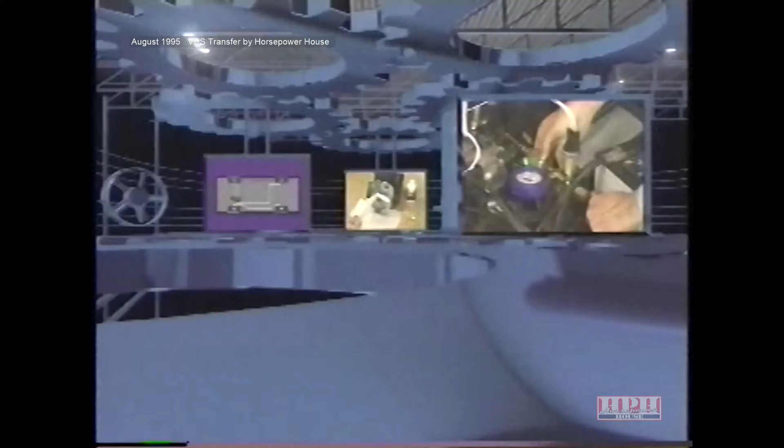In recent years, anti-lock brakes have become a common feature on new vehicles. Many different kinds of ABS systems, produced by a variety of manufacturers, are found on Chrysler Corporation vehicles. Keeping track of these systems can sometimes be quite a challenge.

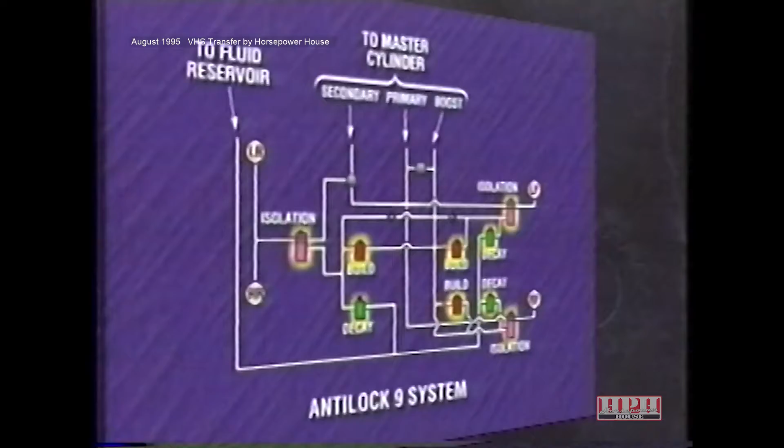Anti-lock 9 includes 3 isolation valves, 3 build valves, and 3 decay valves, for a total of 9 solenoid valves, hence the name Anti-lock 9. Anti-lock 10 uses an additional isolation valve, so there is one in each of the rear wheel circuits. There are other important differences between these systems as well, including diagnostics and vehicle application.

The Bendix Antilock 9 system is found on 1989 to 1991 Jeep Cherokees. You'll find the Antilock 10 system on a few more models: 1990 to 1993 Dynasty, New Yorker Salon, Imperial, and New Yorker Fifth Avenue; 1991 to 93 Caravan, Voyager, and Town & Country; and 1991 to 1992 Premier and Monaco, all optionally equipped with Bendix 10 systems.

Earlier this year, Chrysler Corporation published a manual specifically covering these two systems, the Bendix Antilock 9 and 10 Service and Diagnostic Procedures Manual. All service and diagnostic information for vehicles equipped with the Antilock 9 and 10 systems, except for Premier and Monaco, can be found in this manual. It supersedes all other service and diagnostic manual information and training materials previously published on these ABS systems.

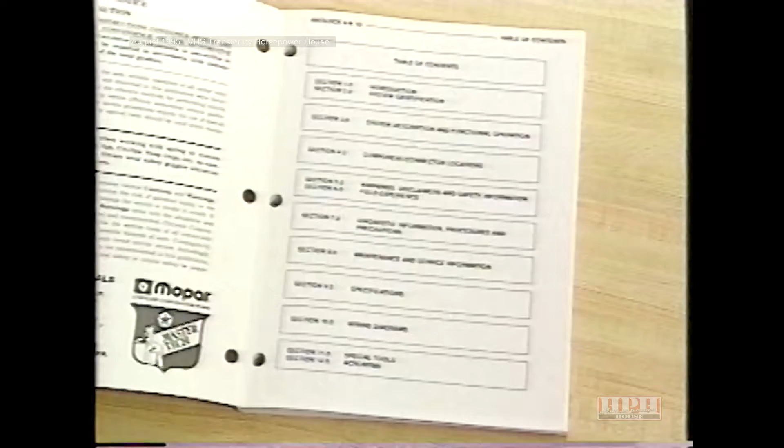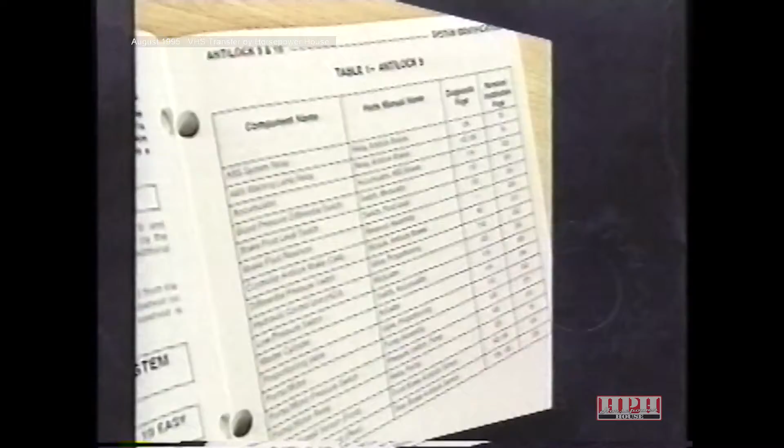Since this manual is set up a little differently than both the service manual sections and diagnostic procedures manuals you're used to, let's take a few minutes to familiarize you with the format. This manual is divided into 12 sections. The first 2 sections contain introductory material, including component charts listing the locations of both diagnostic and service information for various components, and ABS applications charts.

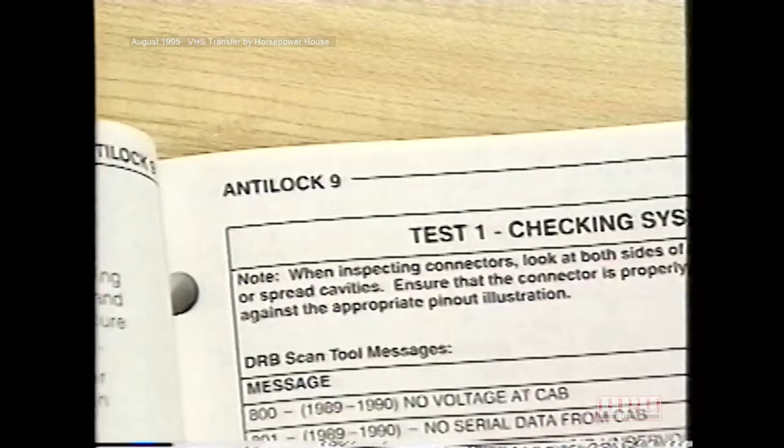Next, you'll find description and operation information for each of the systems, followed by connector pinouts and component locations. By the way, each section in the manual contains its own table of contents to help you find information within that section. The next major section contains diagnostic procedures. The first part of the section contains Antilock 9 procedures, and the latter part is for Antilock 10. Always be sure you're in the correct section before beginning any diagnostic steps.

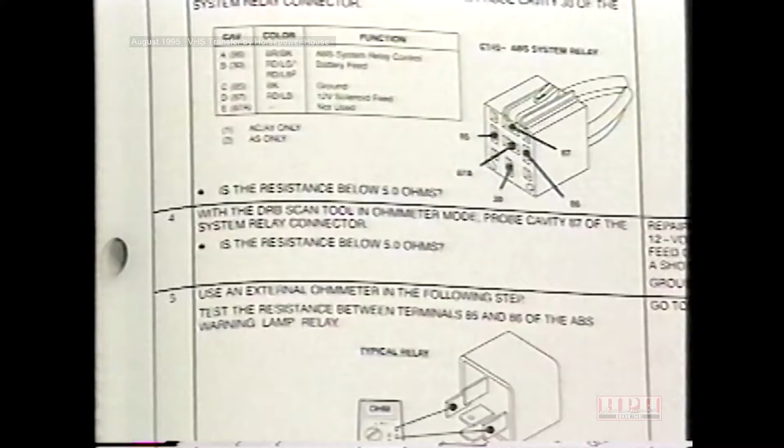As you'll notice when you look at the diagnostic procedures, this section does not use the flowchart diagrams you're familiar with. Rather, it uses diagnostic charts, but these are just as easy to use. Just perform the action described in the action box and answer the corresponding question either yes or no. Your next step, or a repair, will be indicated in the appropriate box.

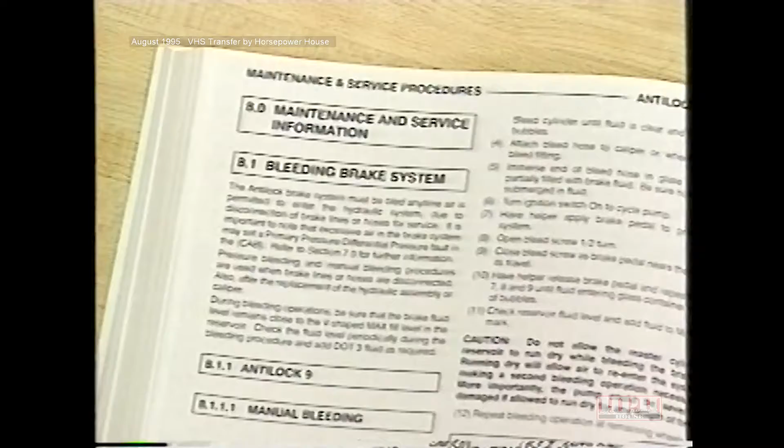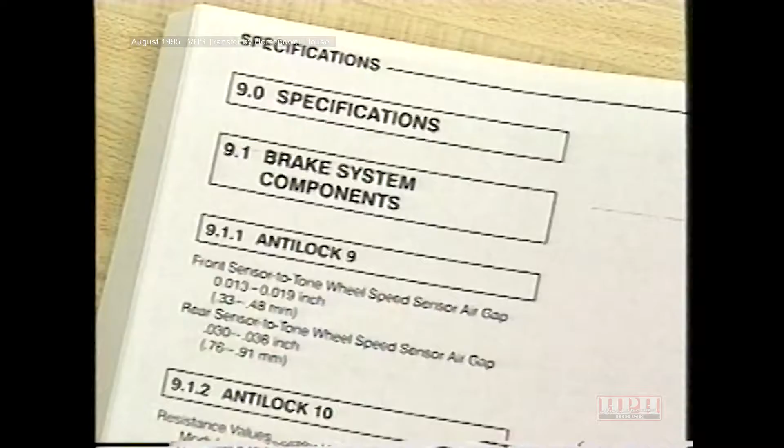After diagnostic procedures, you'll find the maintenance and service procedures. Again, the procedures for Antilock 9 and Antilock 10 are separated, so be sure to look under the appropriate system. Section 9 is the specification section, where you'll find such things as wheel speed sensor to tone wheel gaps, service part numbers, and tightening references.

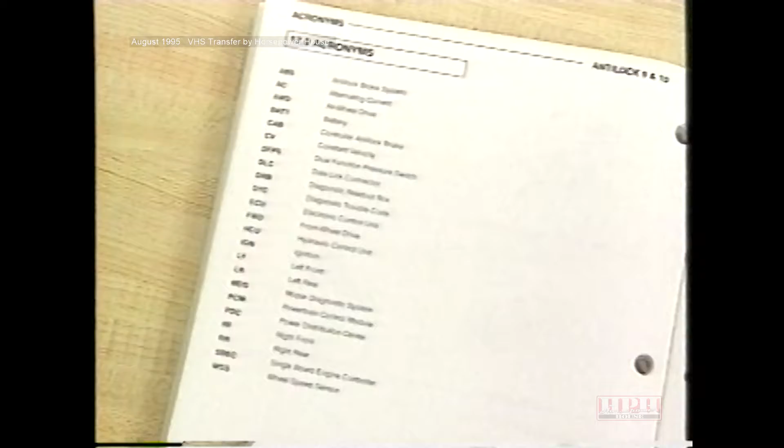If you need to reference wiring diagrams while performing service or diagnostic procedures, these are also available in the manual. You'll find wiring diagrams separated by body style in Section 10. And finally, a special tools section and acronyms can be found at the end of the manual.

In the next section, we're going to take a look at a diagnostic procedure on the Antilock 10 system. But first, let's take a minute to answer this review question.

True or false? The Bendix Antilock 9 and 10 Service and Diagnostic Procedures Manual should take precedence over the 1991 Bendix ABS and AW4 Transmission Systems Diagnostic Procedures Manual for Jeep. The answer is true. The Bendix Antilock 9 and 10 Service and Diagnostic Procedures Manual should supersede the ABS information in all old service, diagnostic, or training manuals.

One condition you may encounter on the Bendix Antilock 10 system is a master cylinder seal leak. With this condition, the yellow ABS warning lamp and the red brake warning lamp will be illuminated.

In addition, the pump motor will run continuously, or in a few cases, will cycle on and off frequently. A low accumulator fault will also be set.

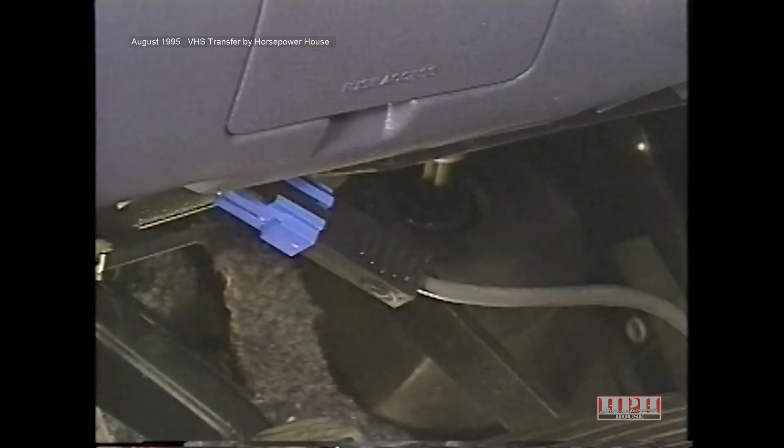So, after a visual inspection, diagnosis of the problem should begin by using the DRB3 to check the system for faults. You'll need to use SuperCard CH8000 with the DRB3 for any of the vehicles equipped with Antilock 10.

Checking for DTCs, we do in fact get a low accumulator fault. So, following the chart in the Antilock 10 Diagnostics section, we proceed to test 7.

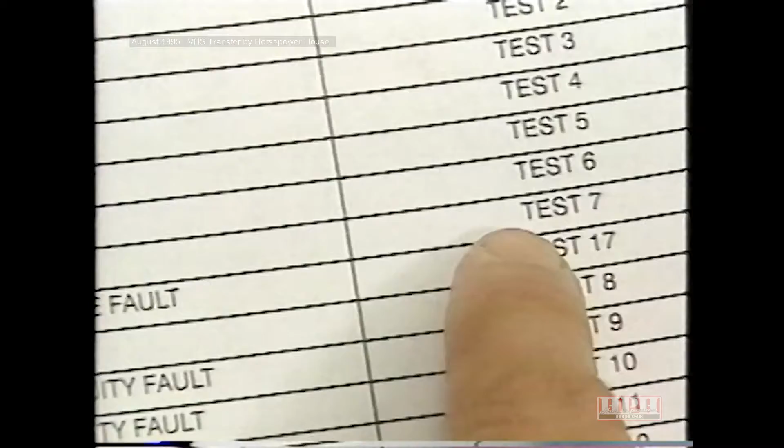Remember, if any other faults are present at this point, be sure to make a note of them. Diagnosis and repair will need to be performed for each fault you encounter, and should be performed in the order in which they appear here.

Test 7 is the low accumulator fault test. On the page preceding the diagnostic steps, we can find background information about the fault, including a brief description, symptoms, and possible causes.

Looking at the actual diagnostic procedure, Step 1 asks if Test 1 has been performed.

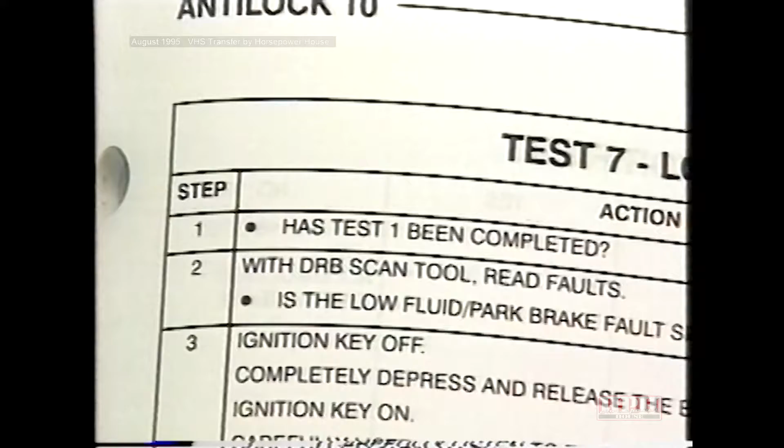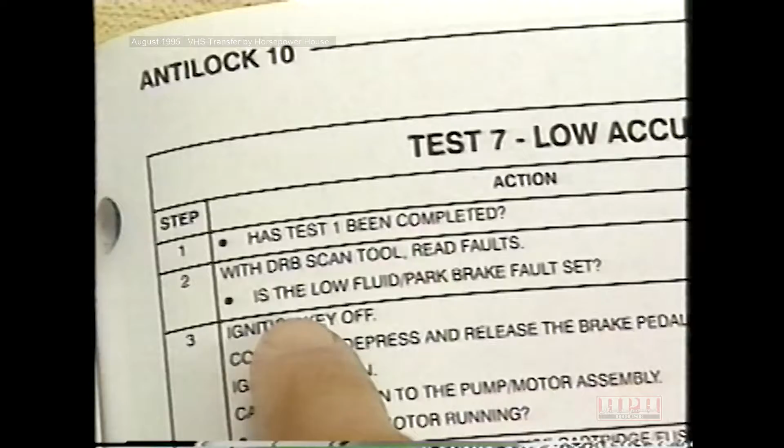Remember, Test 1 was to read DTCs, so yes, we have finished this step. In Step 2, we are asked if the low fluid park brake fault was set. In this case, no other faults were set, so we answer no and move on.

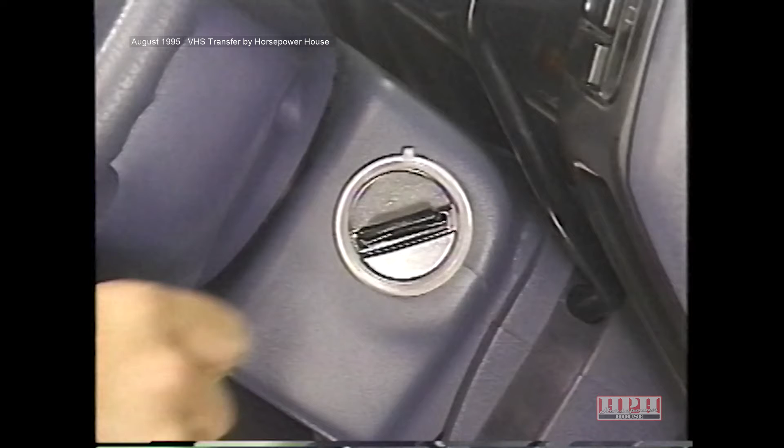Following the procedure, we now press and release the brake pedal 40 times to depressurize the accumulator. The ignition should be off for this part. Once we get to 40, we turn the ignition on to find out if the pump motor is running, and we can hear that it is.

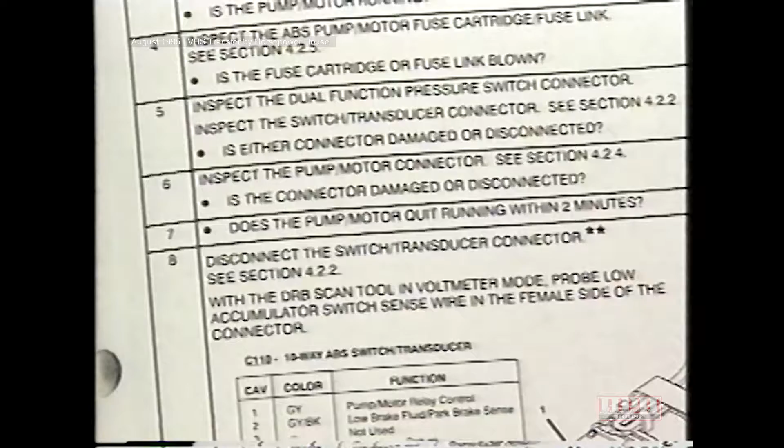So, following the diagnostic procedure, we proceed to Step 7, which asks if the pump motor quits running within 2 minutes. In this case, the answer is no. The pump motor does not shut off within 2 minutes. As the procedure instructs, we now go to Test 22.

Test 22 is the hydraulic pressure performance test. Again, background information is provided on the page preceding the diagnostic procedures.

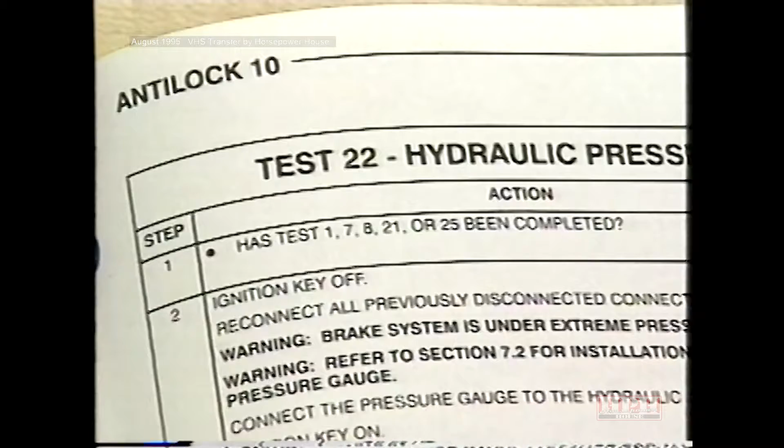Step 1 in the procedure asks if Test 1, 7, 8, 21, or 25 has been performed. Of course, we have performed both Tests 1 and 7, so we can go to Step 2, where we are instructed to connect the pressure gauge to the hydraulic assembly.

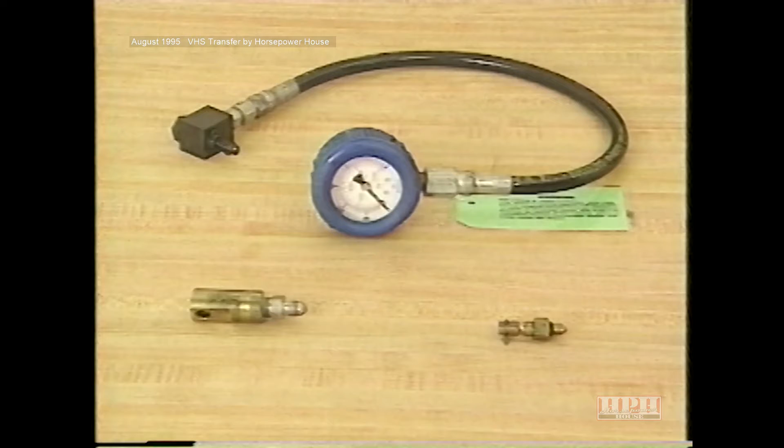The pressure gauge used for Chrysler, Plymouth, and Dodge vehicles is special tool number 6163, along with adapters 6505 and 6491A.

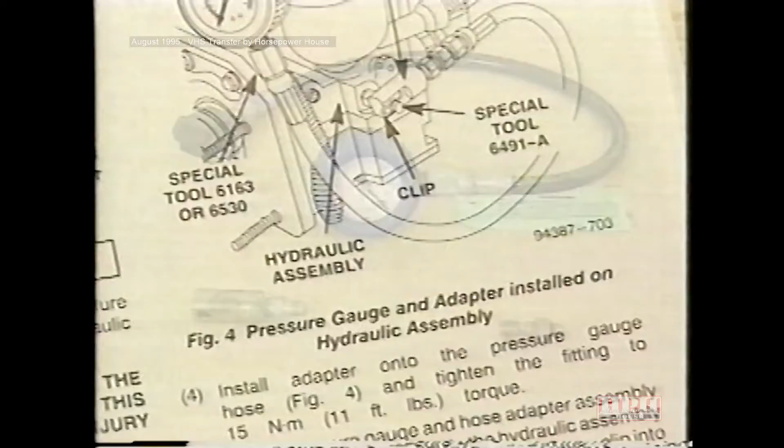Instructions for attaching the pressure gauge are found in Section 7.2.1 of the Service and Diagnostic Procedures Manual. Be sure the accumulator is fully depressurized before attempting to connect the pressure gauge.

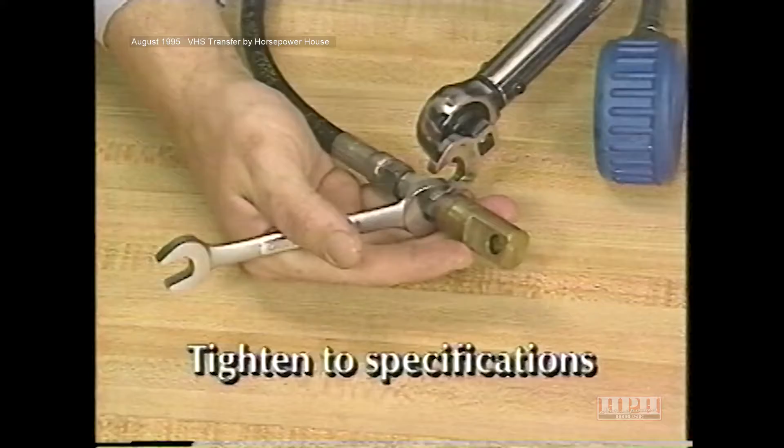It may be necessary to pump the brake pedal again until significant pedal effort is felt. To install the pressure gauge, first, install adapter 6505 on the pressure gauge hose. Since we are working with high pressures, be sure to tighten the adapter to the specifications found in the Service and Diagnostic Procedures Manual.

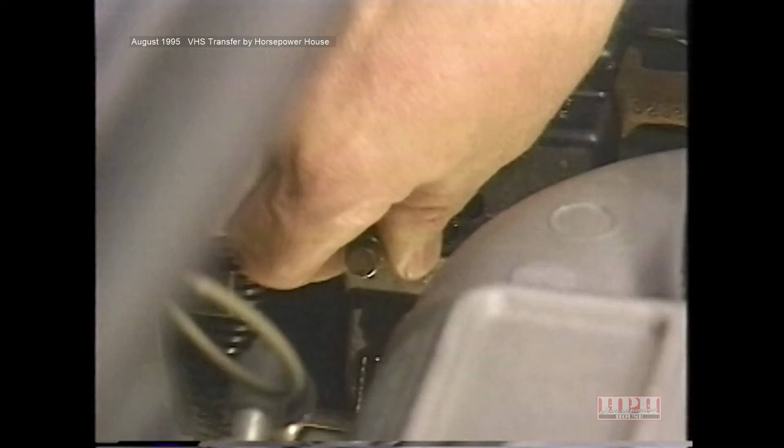Then, thread the other adapter, special tool number 6491A, into the accumulator port on the hydraulic assembly. And again, tighten to specifications.

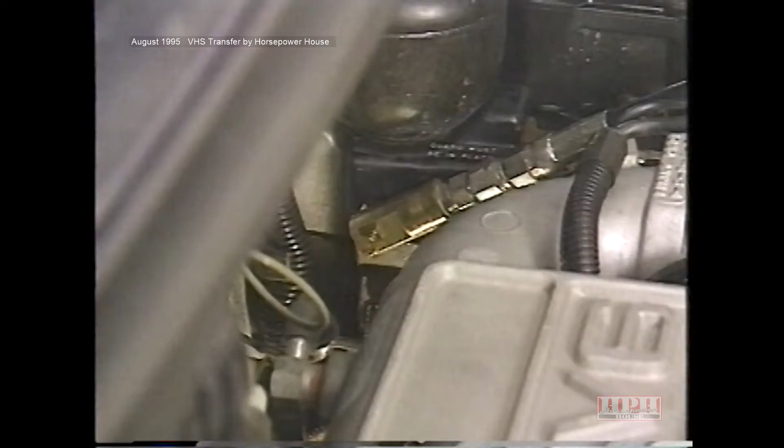Finally, install the pressure gauge adapter on adapter 6491A. And install the retaining clip.

Now, still following step 2, we turn the ignition on and observe the pressure gauge. We'll make note of all transition points in the rate of pressure buildup. In this case, the pressure builds quickly to about 400 psi.

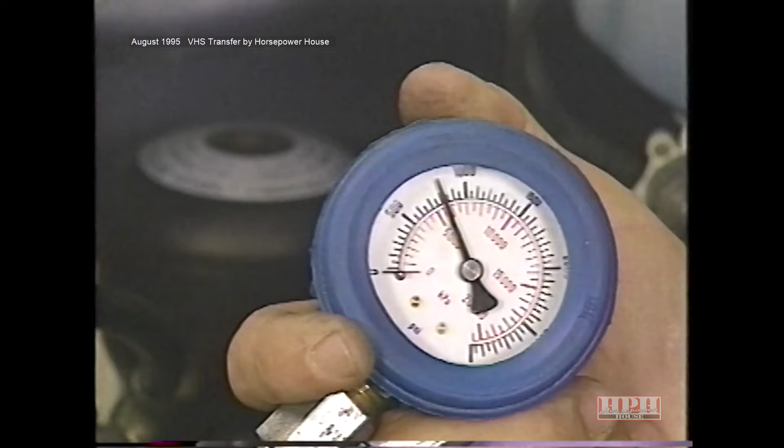Then it climbs more slowly to around 900 psi. At this point, the pressure build seems to stop. After several minutes, the pressure has not risen past this level, and the pump motor is still running.

Using this information, we can answer the questions in the diagnostic procedure, and we find that we should proceed to step 17. In this step, we are again instructed to depressurize the hydraulic accumulator by pumping the brake pedal a minimum of 40 times with the ignition off.

Now we must install the internal leakage test fixture, which is special tool number 6685. This special tool is designed to isolate the hydraulic assembly from the pump motor to determine if an internal leak is present and if the leak is in the hydraulic assembly or the pump motor.

It can be used whether the pump motor shuts off or not.

Instructions for installing the test fixture can be found in section 7.2.2 of the Service and Diagnostic Procedures Manual. Let's take a look at the installation procedure and see just how this special tool can help in our diagnosis.

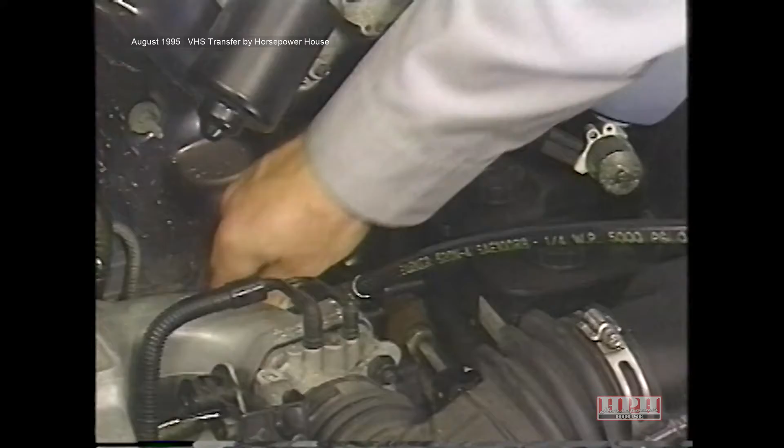Once you've completely depressurized the hydraulic assembly, remove the hydraulic assembly wiring connector from the dual function pressure switch on the bottom of the hydraulic assembly. Then connect the test fixture connector to the connector you just removed from the dual function pressure switch.

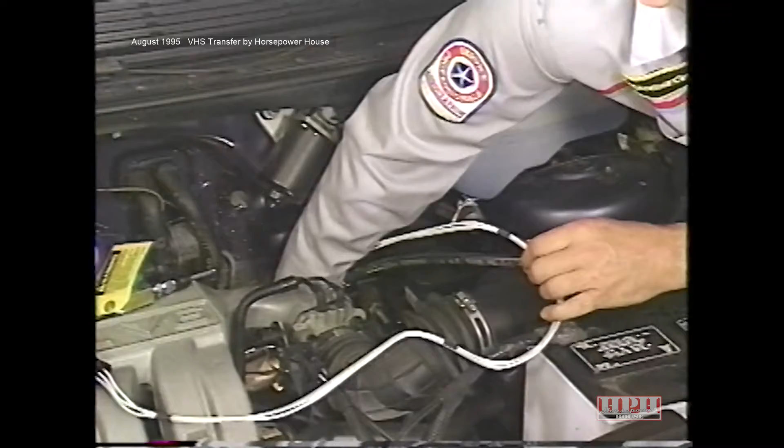Next, locate the high pressure brake fluid hose going from the hydraulic assembly to the pump motor, and remove the tube nut from the fitting on the hydraulic assembly.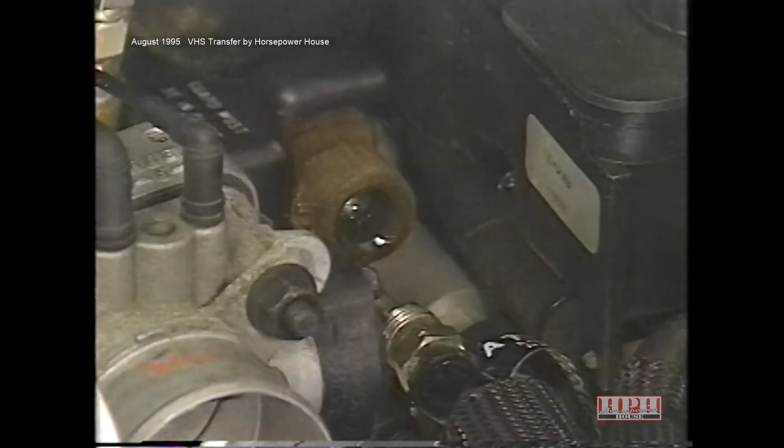Now verify that the test fixture shutoff valve is in the open position, and install the test fixture between the high pressure brake fluid line and the high pressure adapter on the hydraulic assembly. Be sure to tighten the tube nut to the proper specifications.

Your next step would be to install the pressure gauge in the accumulator port, had it not been previously installed. But since it's already in place, let's continue with the diagnostic procedure.

Turn the ignition on and let the pressure build to its highest steady point. Did the pressure build to pump motor shutoff? In this case, the pump motor did not shut off.

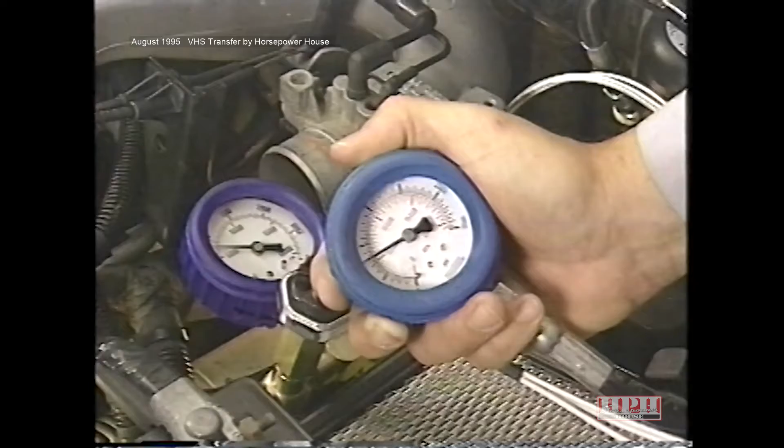So, following the procedure, we go to step 18, which tells us to close the shutoff valve on the test fixture. This valve isolates the pump motor from the hydraulic assembly.

This time, the pressure built quickly above the steady pressure point, and the pump motor finally shut off, since the pressure tester's dual function switch is on the pump motor side.

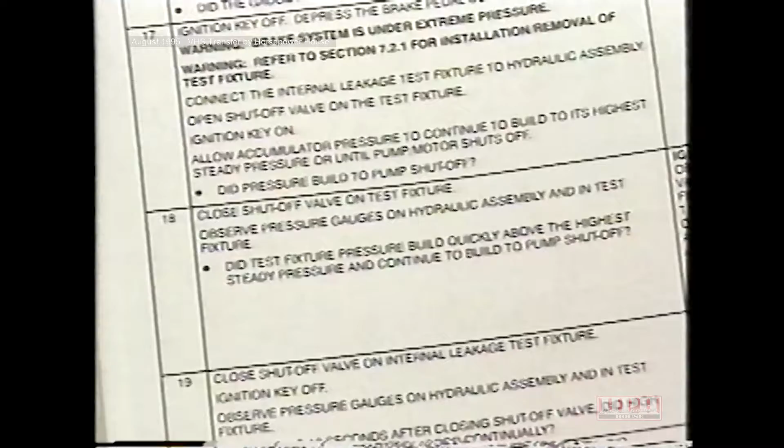Again, step 18 asks, did the pump motor shut off? By answering yes, we find the repair for this condition, which is to replace the master cylinder piston assembly.

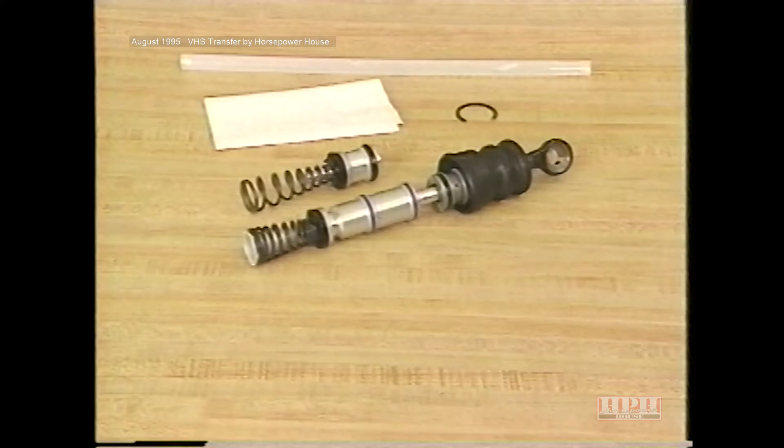The piston assembly is replaced using an actuator piston assembly kit, part number 4740-084 for passenger cars and 4740-086 for minivans. We'll cover this repair in detail later in the program.

The Service and Diagnostic Procedures Manual also says you can replace the hydraulic assembly. However, this should only be done as a last resort if a piston assembly rebuild kit is not available. Authorization through the Star Center is required to replace the hydraulic assembly.

See, now wasn't that easy? Using the internal leakage test fixture, we were able to isolate the leak in the master cylinder by separating the pump motor from the hydraulic assembly.

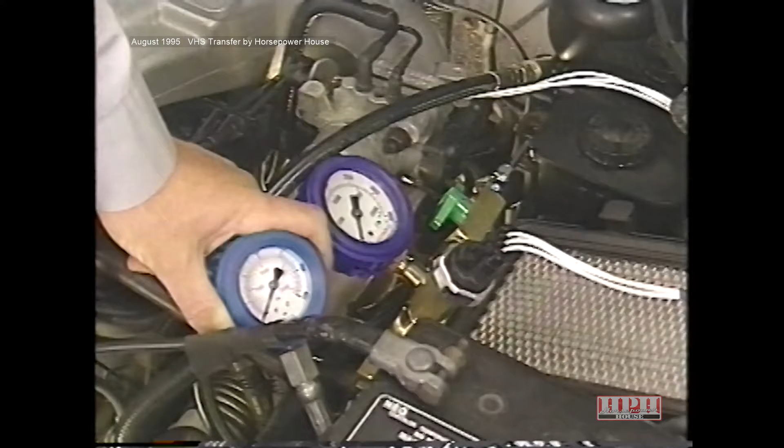Removal procedures for the pressure gauge and test fixture are found in the Service and Diagnostic Procedures Manual. Be very careful to depressurize the accumulator before removing any of the special tools.

Coming up next, we're going to take a look at this same condition on the Bendix Antilock 9 system to see what some of the diagnostic differences are. But first, try another review question.

In order to depressurize the accumulator, you must: A, hook up the pressure gauge; B, open the relief valve on the accumulator; or C, pump the brake pedal at least 40 times with the ignition off.

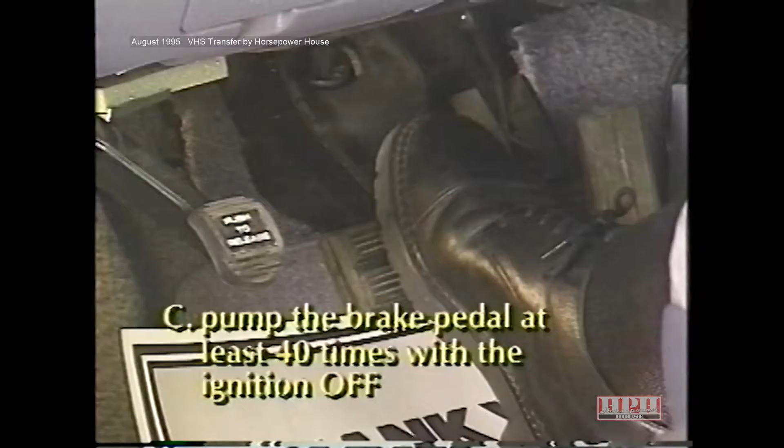The answer is C. Pumping the brake pedal at least 40 times with the ignition off until strong resistance is felt in the pedal is the proper way to depressurize the accumulator. Failure to do so at the points indicated in the diagnostic procedure may cause personal injury or vehicle damage.

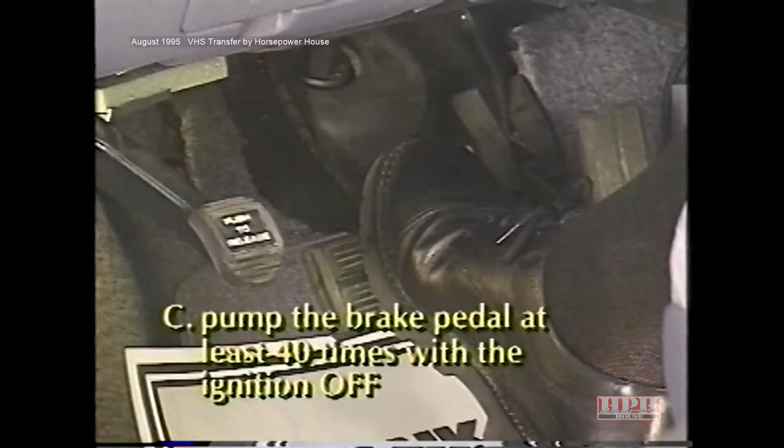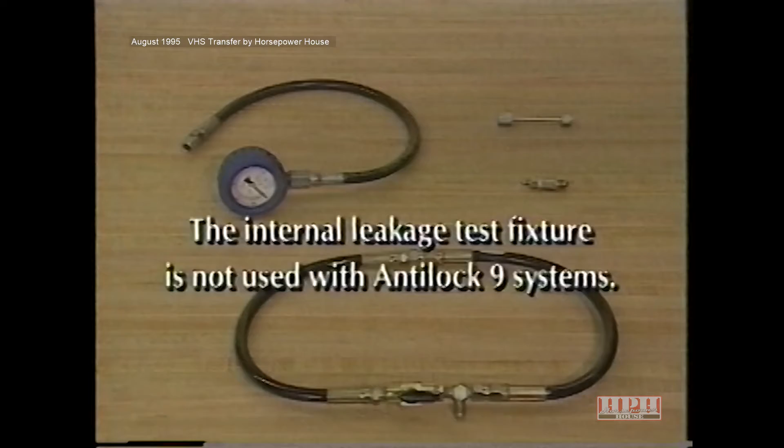Diagnosis of the Antilock 9 system is slightly different than diagnosis of the Antilock 10 system. One variation is that different test equipment is used when diagnosing Antilock 9. So let's take a quick look now at the diagnosis of the Antilock 9 system using the same condition we just examined on the Antilock 10 system, a master cylinder internal leak.

As with Antilock 10, symptoms of this problem include illumination of the yellow ABS warning lamp and red brake warning lamp, a continuously running pump motor, and a low accumulator fault. Again, your diagnosis should begin with a visual inspection for obvious leaks or component damage.

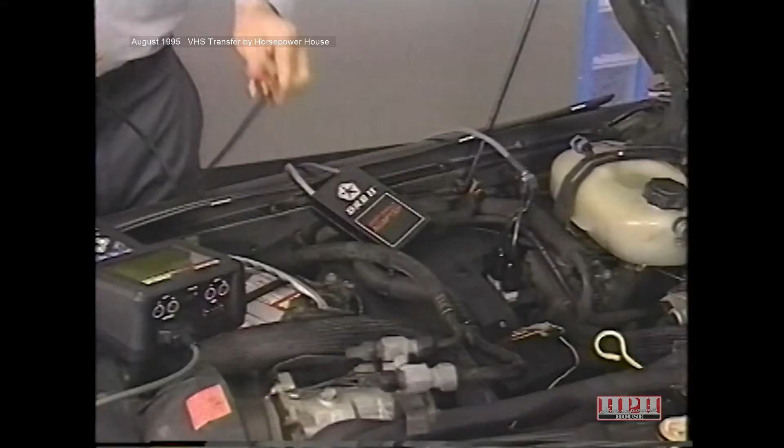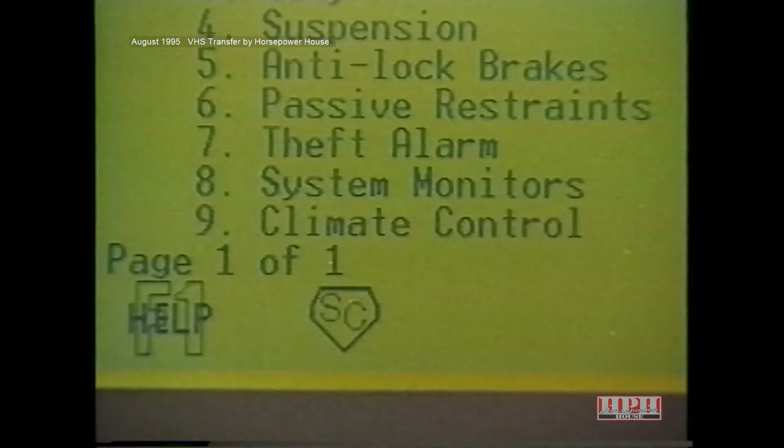Then hook up the DRB2 or DRB3 so you can read the Bendix DTCs. You'll need to use the Jeep Eagle adapter JE1000 and cable CH7500 to hook up the DRB3 on 1989 to 1990 Cherokees. And remember, you also need to use the super card to run the DRB3 on these vehicles.

As we just mentioned, an internal leak in the master cylinder will cause a low accumulator fault, which is fault code 807. With the Antilock 9 system, you may also see the pump motor fault, fault code 812, at this time. Remember to make note of any other fault codes detected by the DRB3.

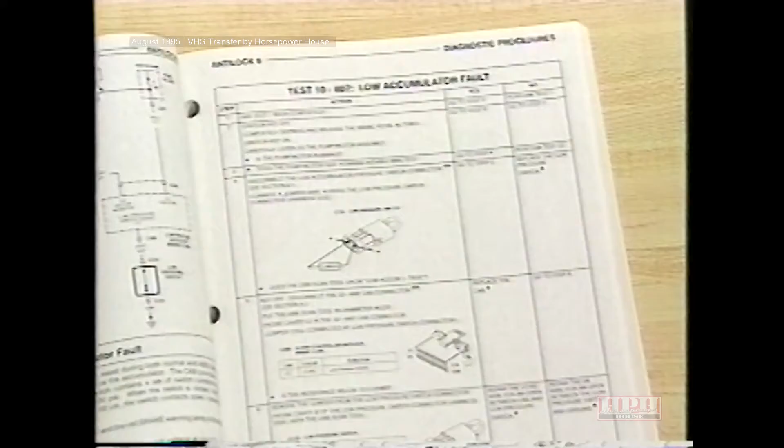The low accumulator test for the Antilock 9 system is test 10. This test is very similar to the low accumulator test we ran on the Antilock 10 system. So, after the accumulator is depressurized, the ignition is turned on, and the pump motor runs continuously.

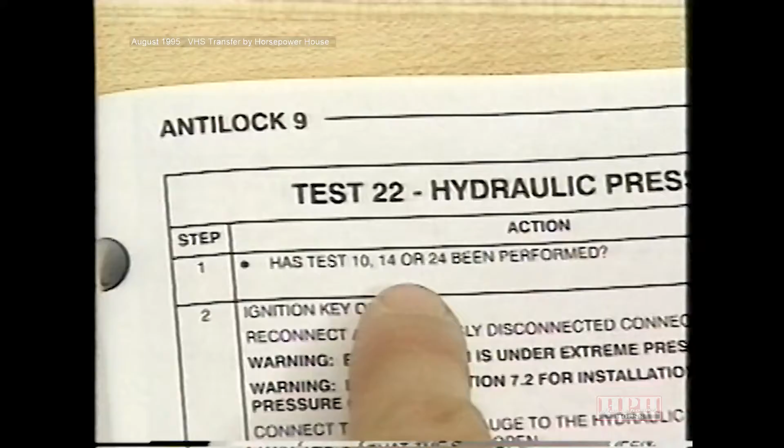So we go to test 22. Again, the first step in test 22 asks if certain other tests have been performed. And since test 10 has been completed, we go on to step 2.

As with the Antilock 10 system, we now install the pressure gauge. The pressure gauge we use this time is special tool number 6530 for Jeep Eagle vehicles, and some new adapters, which are special tool numbers 6868-1, 6868-2, and 6868-5. These adapters are available through Miller Special Tools. Refer to the inside back cover of your Service and Diagnostic Procedures manual for order information.

In this situation, the pressure gauge with these adapters works similarly to the internal leakage test fixture. Before installing this special tool and the adapters, make sure the accumulator is completely depressurized. Then remove the pump motor outlet hose from the accumulator block inlet and install adapter 6868-2 to the pump motor outlet hose. Adapter 6868-1 is installed at the accumulator block inlet.

Next, connect adapter 6868-5 between adapters 6868-1 and 6868-2, and install special tool 6530 on 6868-5. Be sure the shutoff valve on this adapter is open at this point.

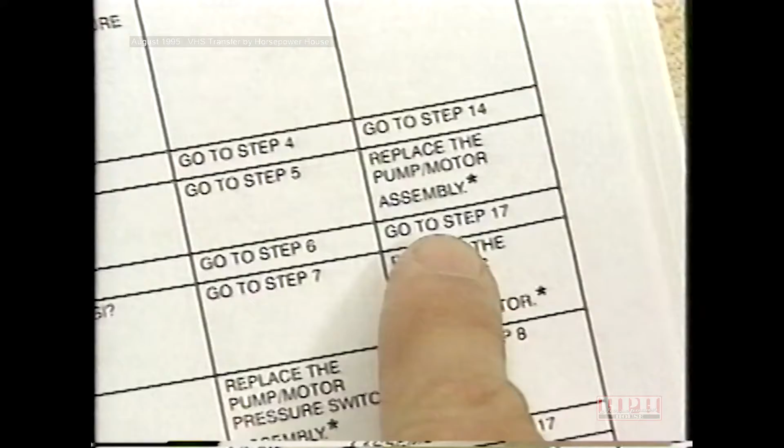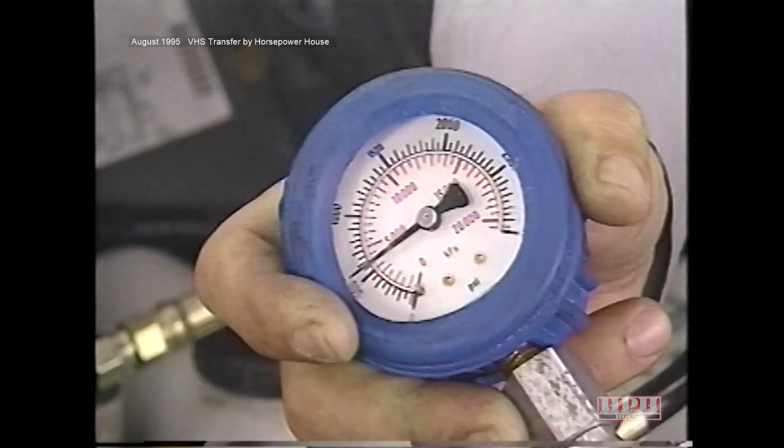Here, we depressurize the accumulator with the ignition off. Then turn the ignition on and allow the pressure to build to its highest steady point, or until the pump motor shuts off. Since the pump motor did not shut off, we close the shutoff valve on the pressure gauge, as instructed by the procedure. Now the pressure continues to build past the previous high point, and the pump motor finally shuts off.

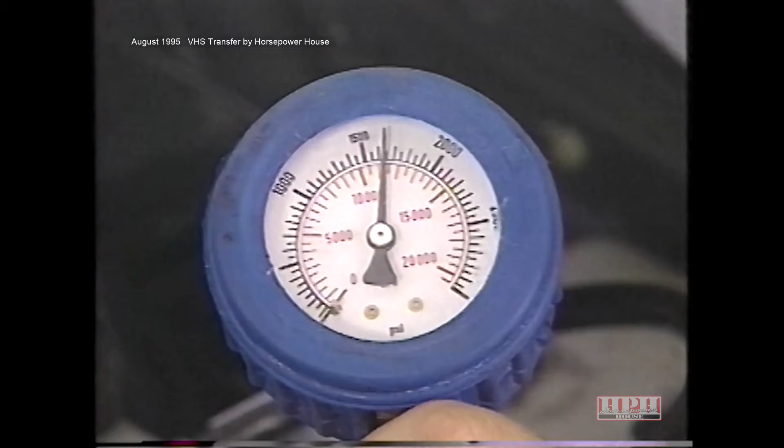So that brings us to the repair for our condition, which, according to the Service and Diagnostic Procedures manual, is to replace the master cylinder assembly or install the master cylinder piston kit. With the Antilock 9 system, either method of repair can be used. So you can see how similar the diagnostic procedures are between the Antilock 10 and Antilock 9 systems.

Now, before we finish this month, we're going to take a detailed look at how to repair this problem, and a few others, simply by installing the new master cylinder pistons.

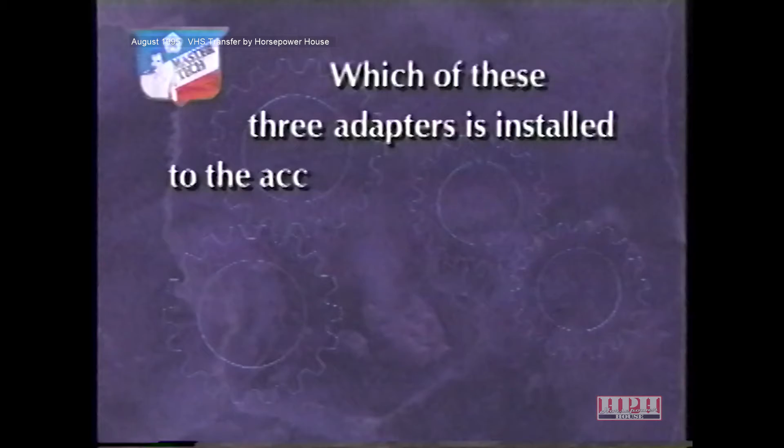But before we move on, try this review question. Which of these three adapters is installed to the accumulator block inlet? A. 6868-1, B. 6868-2, or C. 6868-5?

The answer is A. The adapter installed to the accumulator block inlet is 6868-1.

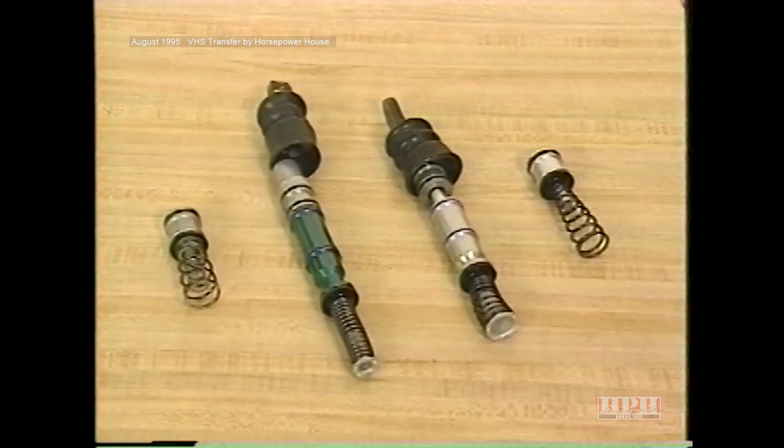An internal leak in the master cylinder does not necessarily require replacement of the entire master cylinder assembly or hydraulic assembly. For both Antilock 9 and Antilock 10 systems, piston assembly kits have been introduced to service the piston assemblies in case of a leak or other problem.

The part numbers for the actuator piston assembly kits can be found in this month's reference book. The piston assembly replacement procedure for both the Antilock 9 and Antilock 10 systems can be found in the Service and Diagnostic Procedures manual.

Replacement of the piston assemblies is basically the same for both systems. We'll be performing the procedure on an Antilock 10 hydraulic assembly, noting any differences you should be aware of for Antilock 9. Step 1 is to remove the hydraulic assembly from the vehicle. Be sure to depressurize the accumulator first by pressing and releasing the brake pedal as discussed earlier.

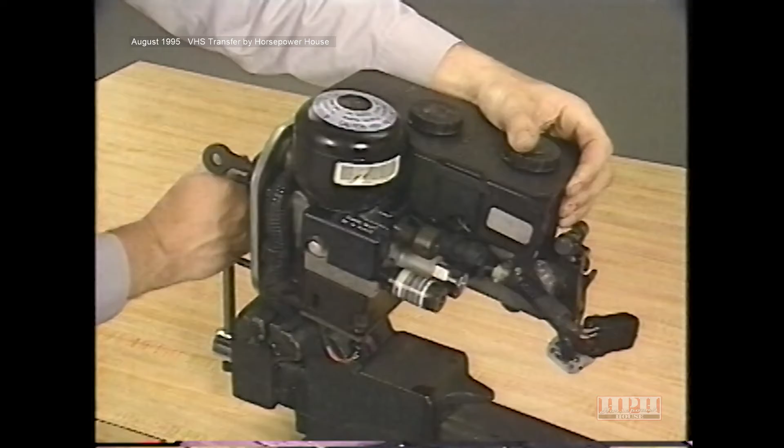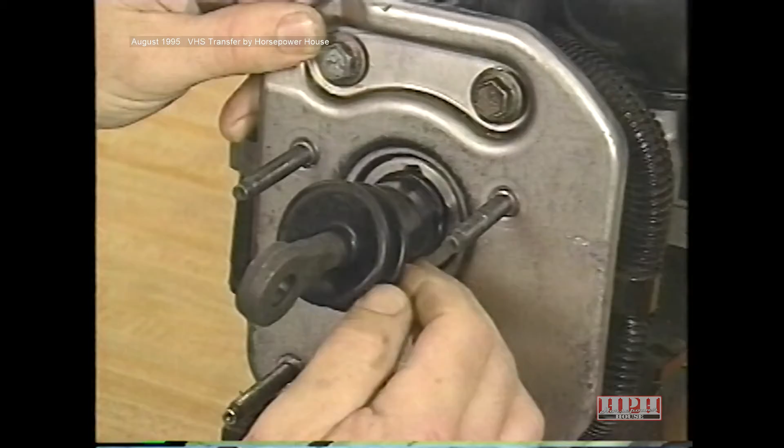Next, secure the hydraulic assembly in a vise. Be careful not to clamp any of the electrical connectors. Remove the mounting gasket from the hydraulic assembly mounting bracket or from the dash panel. Now the black dust boot should be separated from the master cylinder housing. It may be necessary to temporarily loosen the mounting bracket.

Next, place a 1/2-inch box end wrench over the lower mounting stud and loosely install a nut. The wrench should be aligned in the 10 to 11 o'clock position on the input rod bearing for the Antilock 10 hydraulic assembly. If you're working on an Antilock 9 assembly, the wrench should be in the 1 to 3 o'clock position, as seen here.

With the wrench aligned properly, push against the input rod bearing so the bearing moves in about 1/4 of an inch. This will relieve the bearing load on the snap ring and allow you to rotate the snap ring so the open end faces up. Pry the snap ring out of the groove using a screwdriver. The snap ring should be discarded after removal.

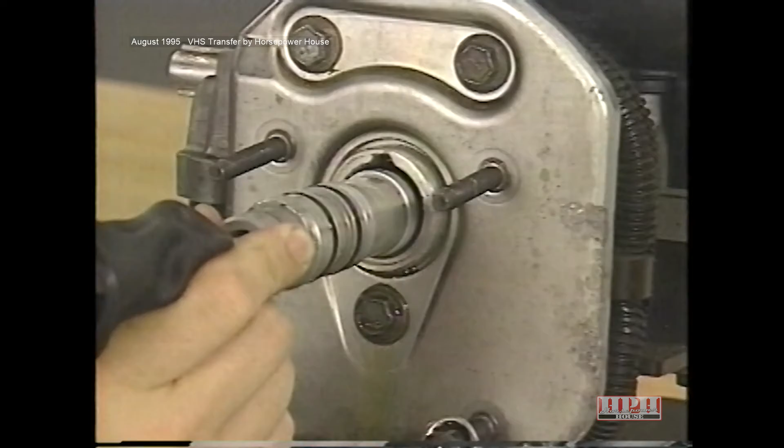Now slowly release the wrench from the input rod bearing. This will allow the primary piston assembly to pop out of the actuator bore. Any fluid from the actuator bore should be caught in a suitable container. Remove the primary piston assembly by pulling slowly and keeping it as straight as possible. If the piston assembly should catch, try sliding it back into the bore a short distance, then pulling it out straight. Do not try to force the piston assembly out.

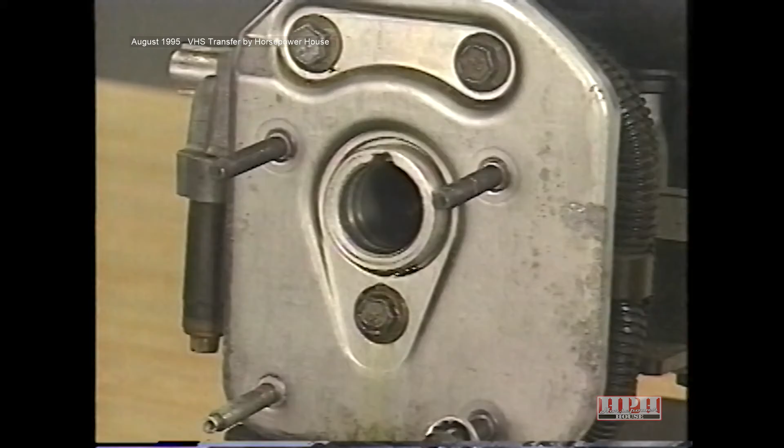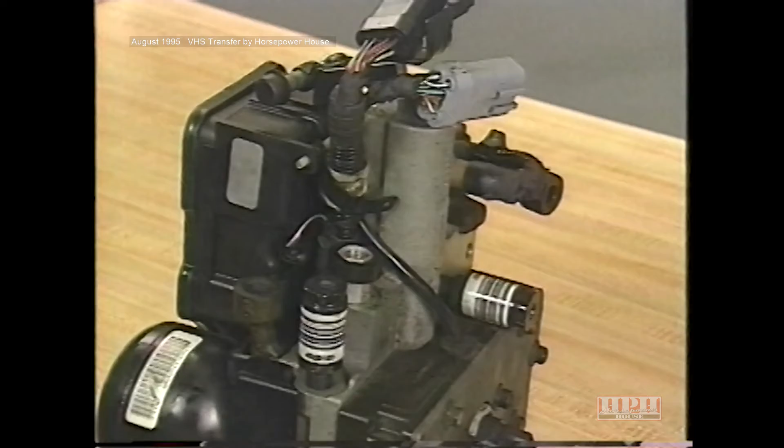Once the primary piston assembly is removed, release the hydraulic assembly from the vise and place it on the bench on a lint-free cloth, stud side down. Place a cloth over the HCU outlet ports of the unit and, while holding the cloth in place, apply regulated compressed air to the secondary outlet port to expel the secondary piston assembly from the bore.

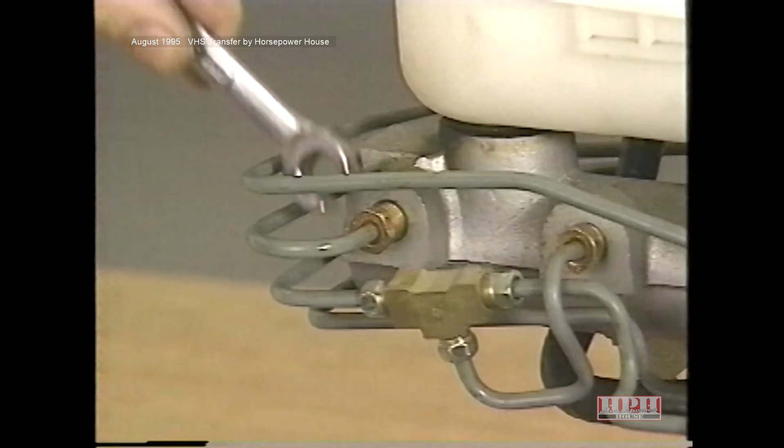On Antilock 9 units, this part of the procedure is slightly different. Before removing the unit from the vise, use a 12mm line wrench and disconnect the secondary line from the front outboard port and position the line clear of the port, taking care not to bend the line.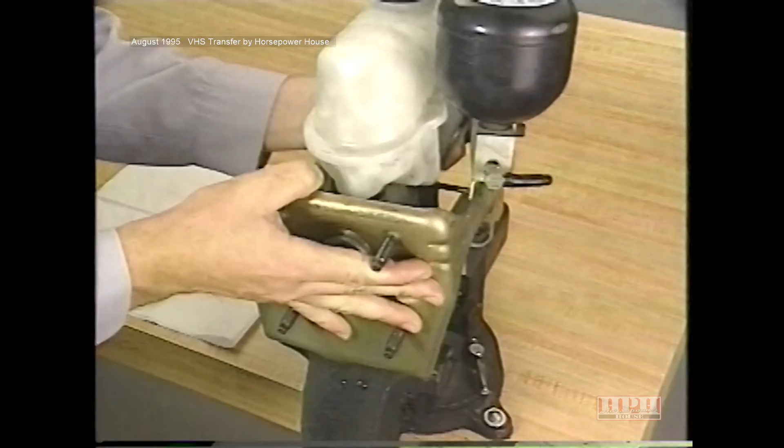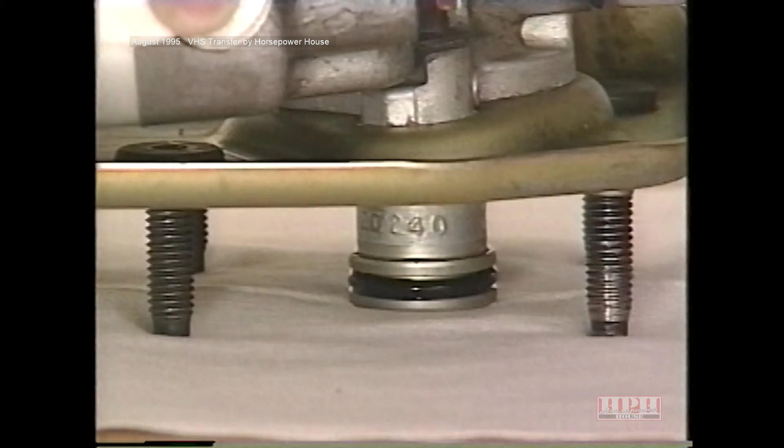Then place the unit on a lint-free cloth on the bench and place a cloth over the hydraulic control unit outlet ports. On this unit, apply the regulated compressed air into the same port you just removed the secondary line from and expel the secondary piston onto the bench. In either case, both piston assemblies should now be removed.

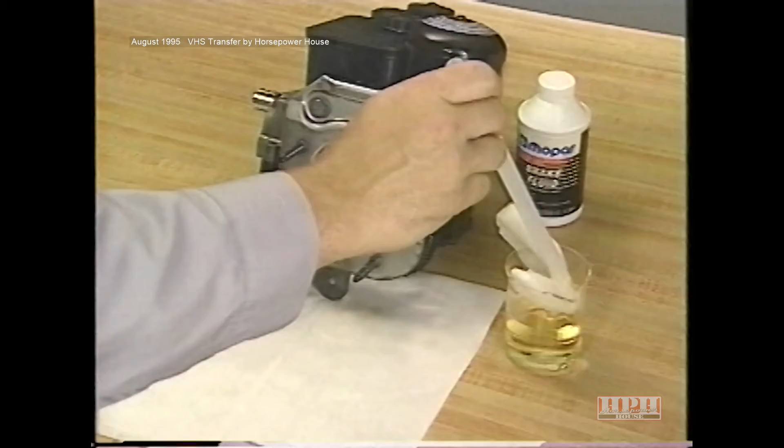Now, before you begin installing anything, the actuator bore must be cleaned. Apply clean brake fluid to the swab provided in the kit and wipe around the entire circumference of the actuator bore, pushing any foreign particles toward the open end.

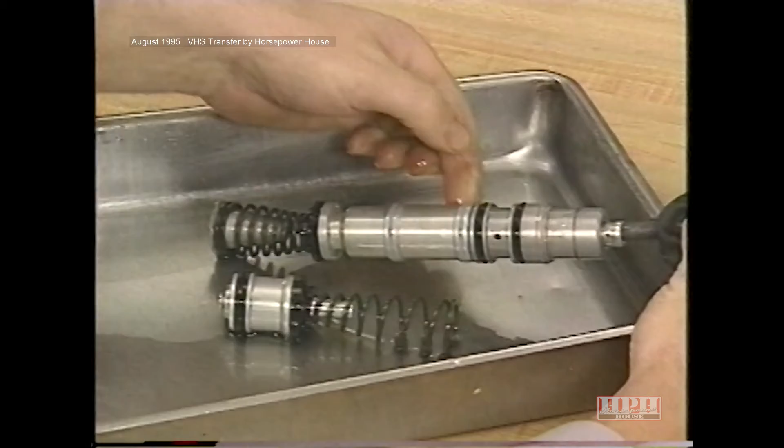After swabbing, flush the bore using clean brake fluid. Then use more of the brake fluid to lubricate the new piston assemblies, including the cup seals, white ring seals, and O-rings. Now place the hydraulic assembly back into the vise to begin installation of the new piston assemblies.

Place the secondary piston, spring end first, into the opening of the actuator bore, being careful not to fold or twist the cup seals. Push the secondary piston in until the rear of the piston is flush with the bore opening. Then position the cage spring at the end of the primary piston assembly over the pin on the end of the secondary piston.

Slowly push the primary piston assembly into the actuator bore. Be sure the cage spring remains over the pin of the secondary piston. In addition, be careful not to rip or twist any of the seals during installation. Remember, an internal seal leak is the problem we're trying to repair.

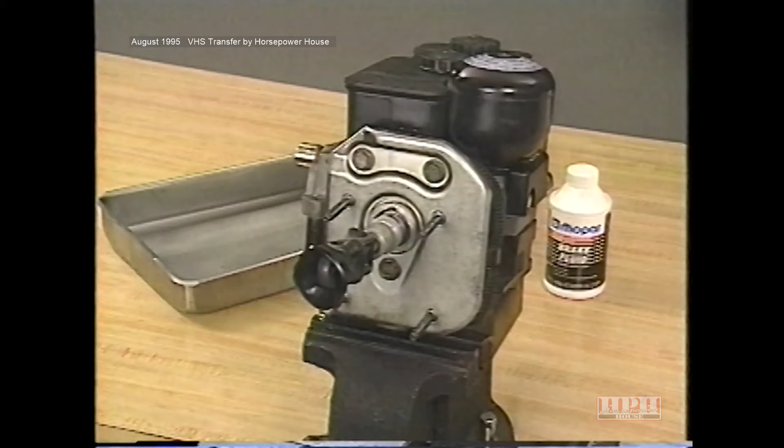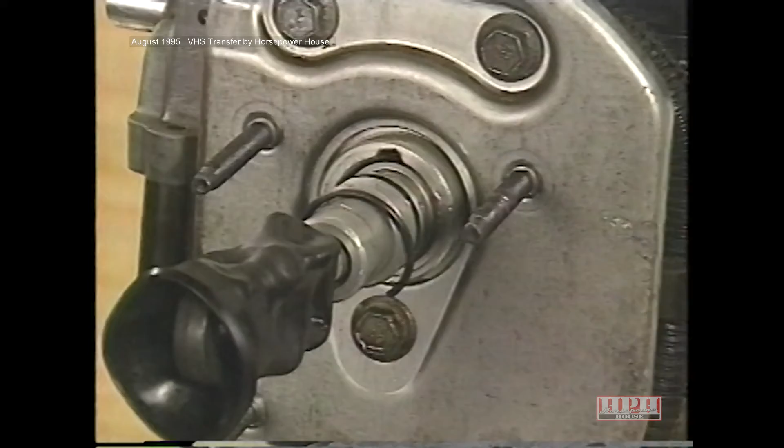When the piston assemblies are in as far as they'll go without much force, place a new snap ring over the master cylinder input rod bearing. In addition, the box end wrench and nut should be reinstalled in the same position as before. Then push on the piston assemblies to compress the springs so the snap ring can be installed.

Secure the piston assemblies and input rod bearing using the box end wrench. The shoulder of the bearing should be in past the snap ring groove.

Now position the snap ring so that one end is in the 10 o'clock position and the other end is in the 8 o'clock position. The keyway at the top of the bore should be covered. Insert the 10 o'clock end of the snap ring in the groove and, using a screwdriver, press the snap ring into the groove in a clockwise direction. When you're sure both ends are properly seated, the wrench can be released.

Now all that's left is to loosen the mounting bracket and reinstall the dust boot, and place the hydraulic assembly back in the vehicle using a new mounting gasket for installation. Be sure to tighten all connections to proper specifications. So there you have it, the complete installation of new primary and secondary piston assemblies.

But before you stop the tape, try this one last review question. The purpose of pushing the box end wrench against the input rod bearing is to: A, relieve the force of the bearing so the primary piston can be removed; B, relieve the force on the snap ring so it can be removed; or C, loosen the primary piston so it will pop out of the actuator bore.

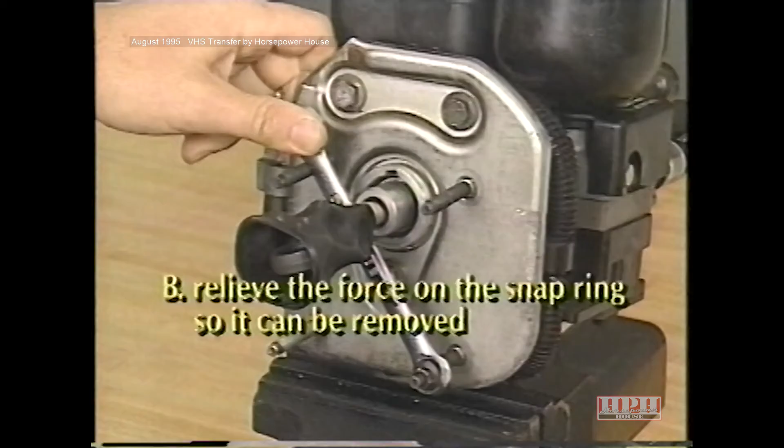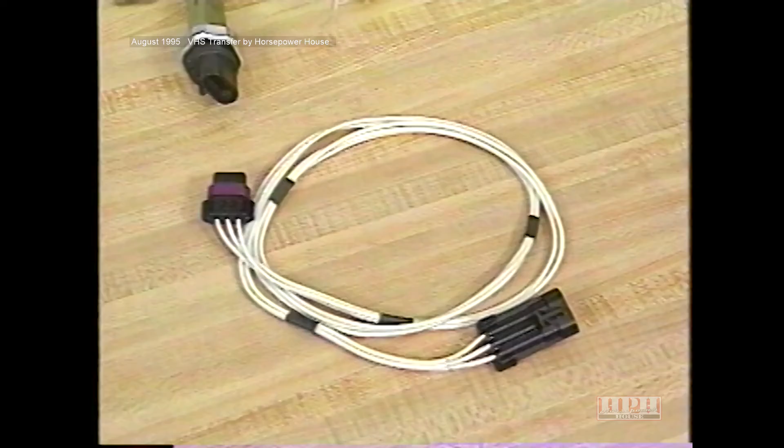If you recall, in our August MasterTech, we discussed Bendix Antilock's 9 and 10 systems diagnosis. We looked at the procedure used to test for internal leaks, performed with special tool number 6685. Since proper use of this tool is critical to prevent causing damage to components, we thought we'd review the tool installation procedure. First, note that a wire harness is included as part of this tool. This must be used in order to avoid damaging the pump motor assembly.

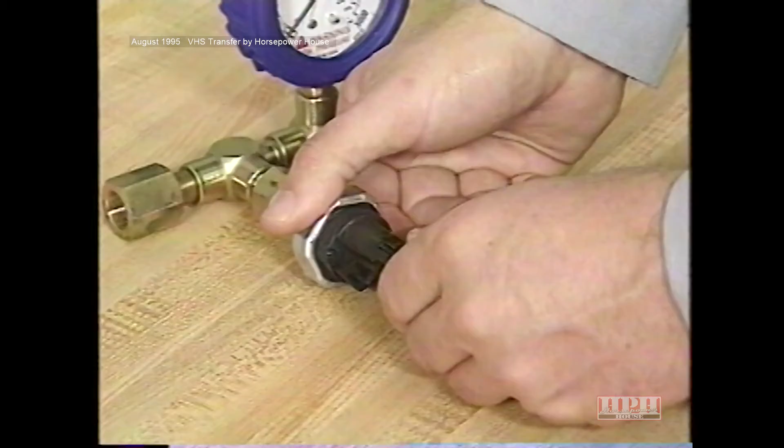After the hydraulic assembly has been completely depressurized by pumping the brake pedal at least 40 times with the ignition off, disconnect the wiring harness from the hydraulic assembly's dual function pressure switch. Then connect the wire harness of tool number 6685 to the test fixture's dual function pressure switch. Next, connect the hydraulic assembly wiring harness that you disconnected earlier to the wire harness of tool number 6685.

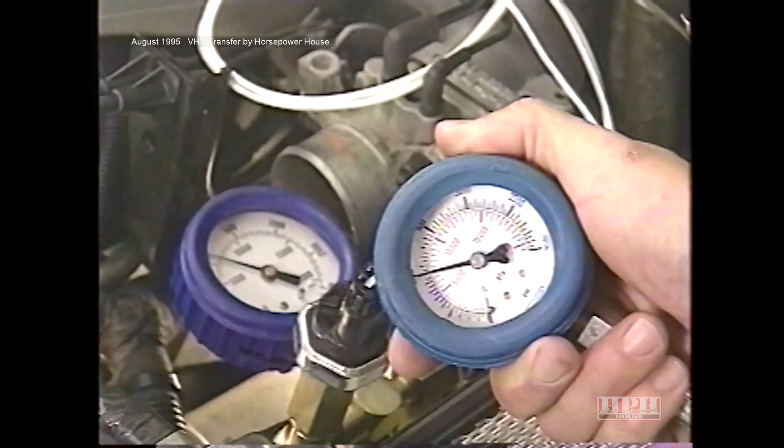The remainder of the test should be performed as described, but remember, failure to use the wire harness of special tool number 6685 will cause excessive pressure in the system and damage to pump motor components will occur.

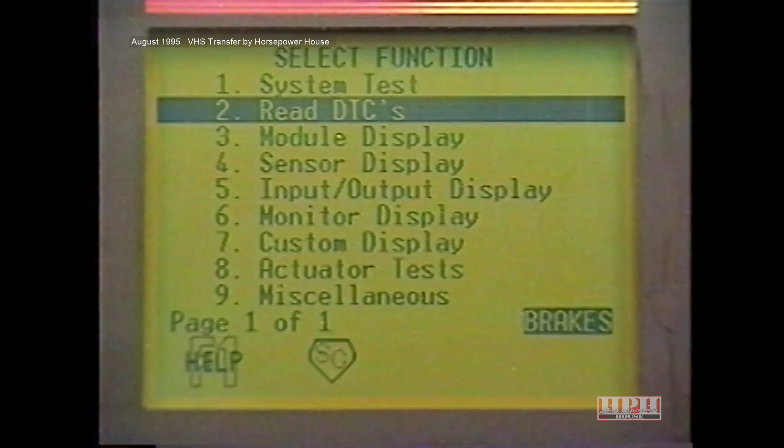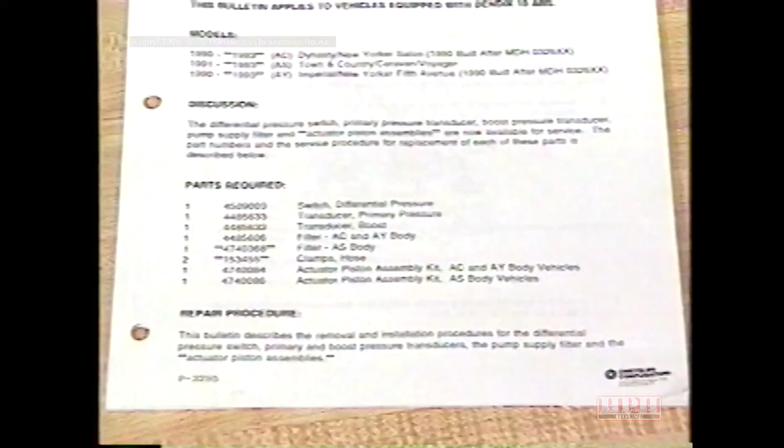The second part of this segment concerns using the information in TSB 052494. If a vehicle equipped with a Bendix 10 ABS system is diagnosed as having a low accumulator fault, or the pump runs continuously, you may try to use this TSB to track down the cause. It's important to keep in mind, however, that the first and last part of the TSB merely lists parts which are now serviceable and the associated service procedures. Replacing these parts is not necessarily part of a repair.

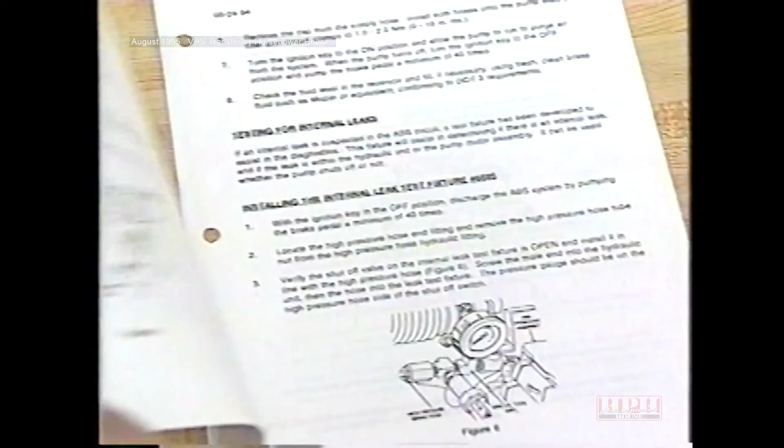To track down the actual cause, you must use the internal leak test referred to on page 7 of the TSB. This is the same test we covered when discussing the wiring harness that must be connected to the test fixture. For information about running this test and for additional diagnostic information, refer to the Bendix Antilocks 9 and 10 Service and Diagnostic Procedures Manual, 81 699 94387, or see the August 1995 MasterTech.